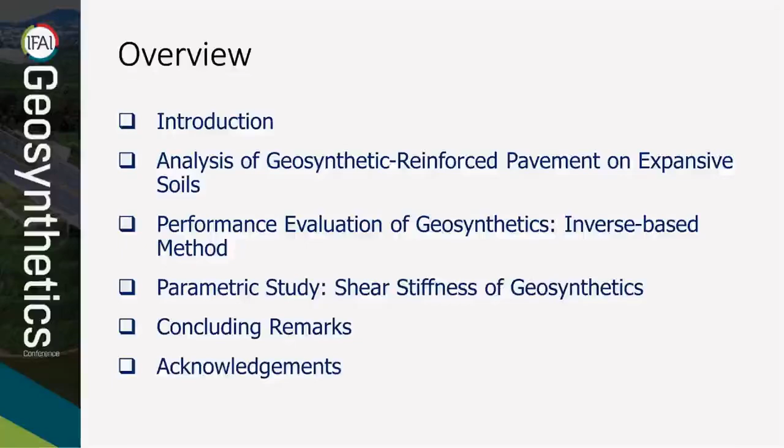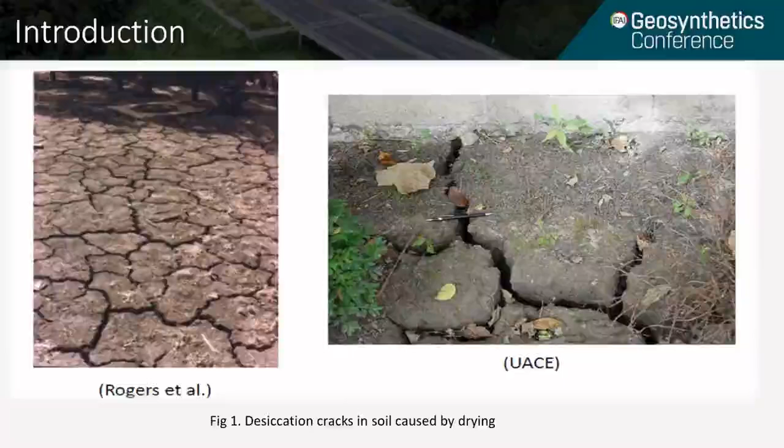In the United States, billions of dollars are spent every year to solve the swelling-related stresses on highways over expansive soils. It is typically not feasible to avoid these soils because of their widespread distribution all over the United States. These soils show volumetric changes because of the presence of swelling minerals such as montmorillonite, that swell or shrink with the fluctuation of moisture content. This figure shows how the soil dries and creates cracking on the surface just because of the shrinkage effect of swelling soils such as the expansive soils.

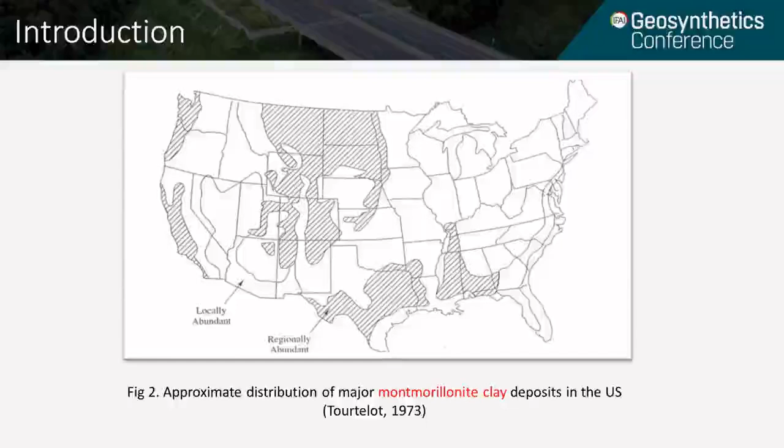This figure shows the approximate distribution of major montmorillonite clay deposits in the United States. You can see from the figure there are some parts such as Texas, some part of Louisiana, and even some of the west coast. Actually, there are a lot of montmorillonite clay minerals available on the ground.

The highways constructed on these expansive soils are subjected to differential movement with seasonal drying and wetting. Because of this, they can cause heave or shrinkage, which ultimately results in the development of cracks that are literally found on the surface of the pavement. In the figure, you can see the most longitudinal cracking developed because of the expansive soil is either on the shoulder of the pavement or along the center line of the pavement cross section.

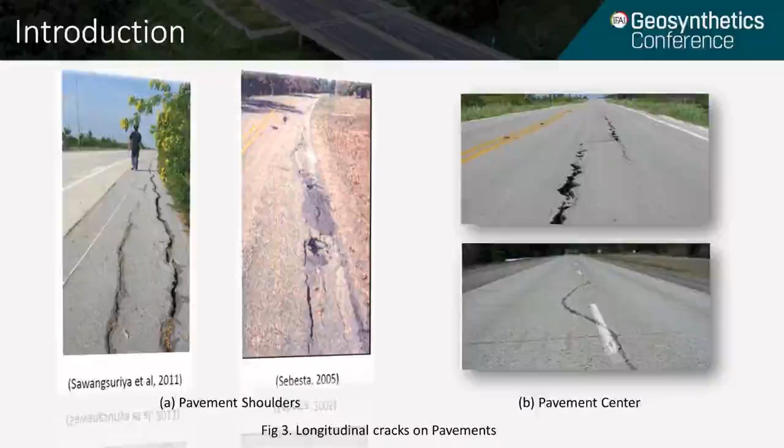To fix this segment of the highway, a mechanical system using geosynthetics can moderate the uplift pressure from the expansive soil subgrade and can protect the pavement surface. Because the pavement structure is good in compression but weak in tension, engineers added geosynthetics in the layer to supplement this limitation of the pavement. A lot of research has been done to understand the effect of traffic loads on the performance of the highway where geosynthetic is put in the pavement layers.

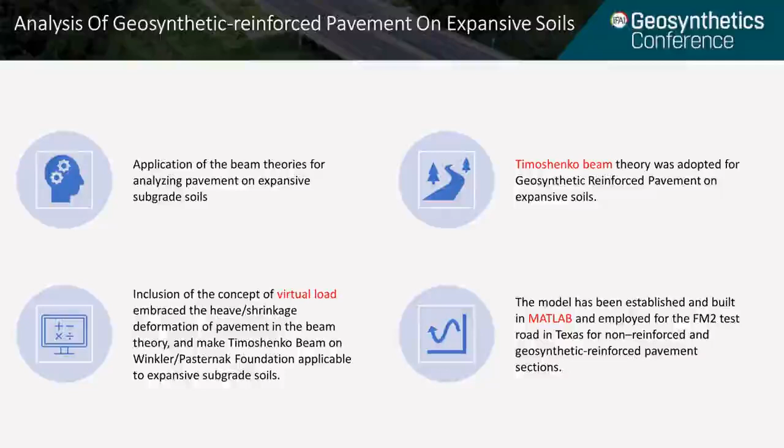However, the performance measurement is not available to understand the effect of environmental loads, such as those resulting from the subgrade volume changes. Many researchers have proposed constitutive models to simulate the behavior of reinforced pavement. However, all the researchers concentrated on a common forward problem. The forward problem means we apply a load on the pavement, the pavement is considered as a beam, and we see how the shear force or bending moment changes within the structure.

But in our case, the pavement deflects not because of an external load, but due to the fact that the subgrade volume is changing. So we have to calculate it through an inverse-based method.

So in this study, we analyzed the geosynthetic reinforced pavement using the beam theories. Some steps through the process to analyze geosynthetic reinforced pavement on expansive soils could be the application of the beam theories for analyzing the pavements on expansive subgrade soils. Then we'll take the Timoshenko beam theory to analyze the geosynthetic reinforced pavement on expansive soils.

So there's a new concept we developed, which is called the virtual load concept. The inclusion of the concept of virtual load will embrace the heave or shrinkage deformation of the pavement in the beam theory, and then make the Timoshenko beam on Winkler or Pasternak foundation model applicable to expansive subgrade soils. The model has been established and built in MATLAB, and this can be employed for different case studies. So we used a case from Texas Roadway Farm to Market 2, for the analysis of the reinforced and non-reinforced sections using this model.

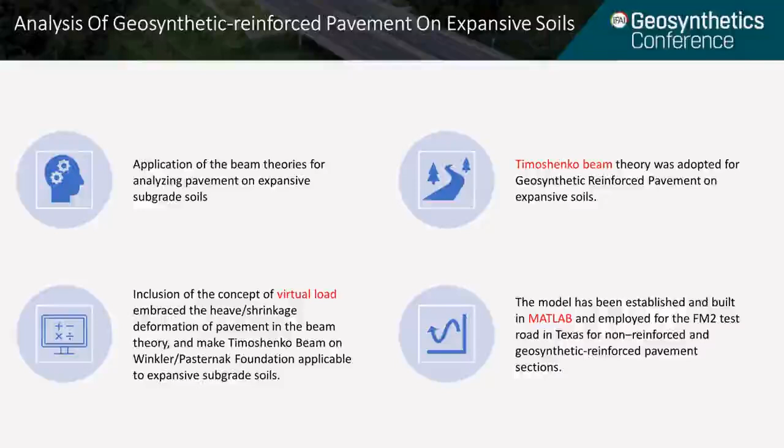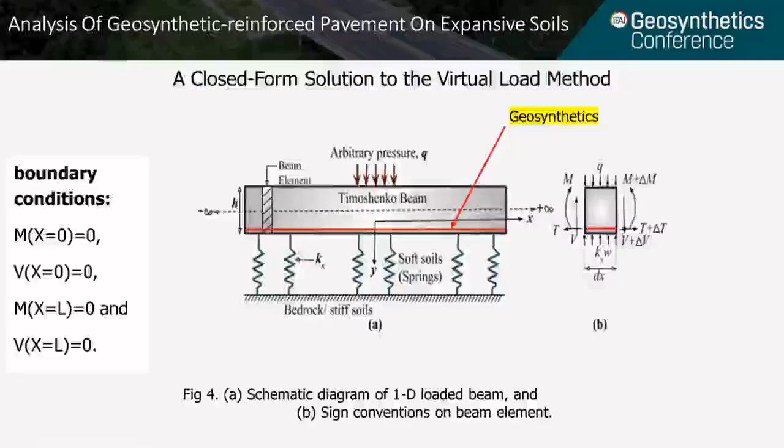So what is virtual load? That's the first question. The virtual load model was developed by Dr. Adnan Khan during his PhD dissertation research at Louisiana Tech University. Virtual load is not a real load, but is the load which causes the pavement deflection equivalent to the heave or shrinkage induced deformation from the subgrade.

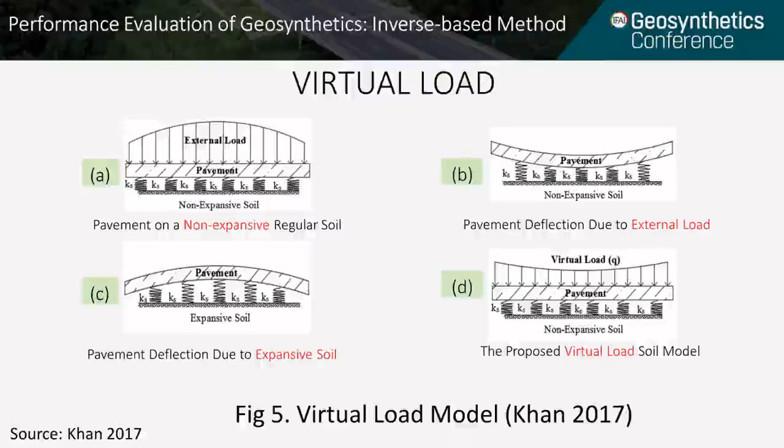From figure A, we see a pavement on non-expansive regular soil where an external load is applied on the pavement, and in figure B, the pavement deflection due to that external load. In figure C, we see the pavement deflection due to the expansive soil, so there is no external load. So we will try to calculate the equivalent load that will cause this amount of deflection. In figure D, you can understand the proposed virtual load soil model, where the virtual load is causing the equivalent deformation from figure C.

To understand the performance of geosynthetic reinforced pavement, we developed the inverse based method. First we have to understand how these longitudinal cracks are developing on the pavement. During the rainfall, the moisture content increases in the subgrade, or during the summer, the moisture content decreases. Since this is an expansive soil, because of the moisture content fluctuations, its volume is changing, either increasing or decreasing. It causes differential movement, and then these longitudinal cracks happen on the pavement surface.

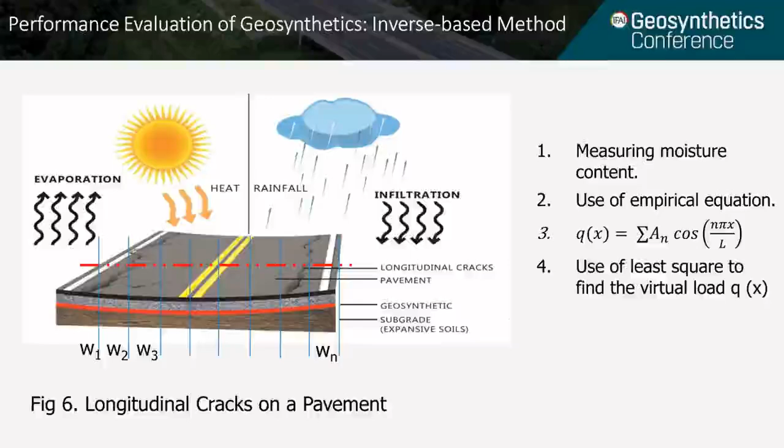Then number 3, we use the load Qx, which is a Fourier series, because using Fourier series we can describe any type of load such as line load or distributed load. Since this is a non-uniform distributed load, Fourier series will give us realistic results. Finally, we will use the linear least square method to find the virtual load parameter and get the virtual load Q. In this study, we are investigating the geosynthetic reinforced pavement, which is simplified as a reinforced Timoshenko beam on an elastic foundation.

So we will study this by selecting a group of parameters, which is shown in the table. These are obtained from previous literature. In the previous literature, they applied a load of 1000 kilopascal on the pavement to finally calculate the deformation. Since our model takes the deformation as an input, we will back calculate the load and see if it gives the exact same load that was applied the first time.

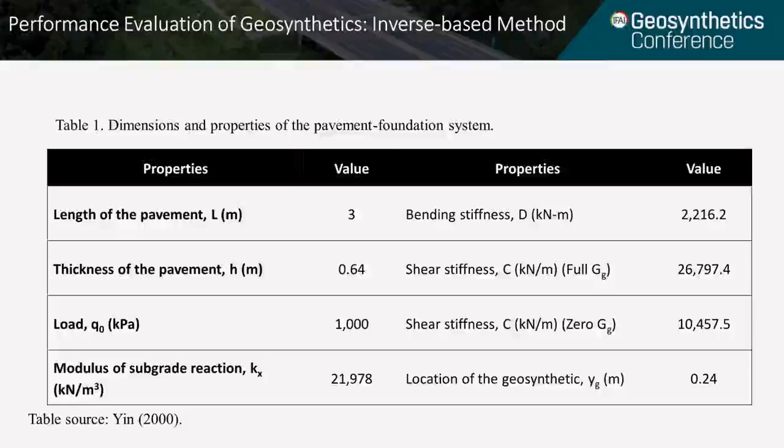In this way we can verify the model, and finally we can calculate the bending moment and the shear forces using our model, and then apply it to realistic case studies like the roadway in Texas FM2.

Here in this figure, you can see the red line, which shows the deflection from the given load Q of 1000 kilopascal, using the forward analysis method. When we use the linear least square or the inverse analysis method, we get this blue line, which is pretty close to the deflection coming from the forward method.

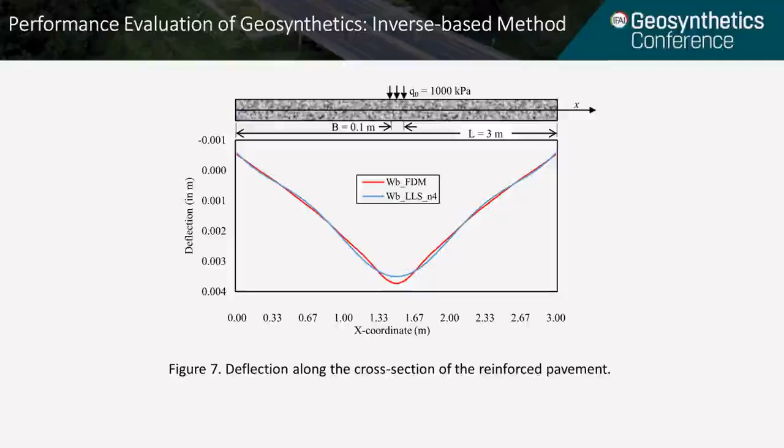Since we are applying the load as a Fourier series, which is unknown, and we know the amount of deflection coming from the pavement, the Fourier constants have to be calculated using the inverse method. All the Fourier constants are regarded as reinforced pavement foundation system parameters, right? We see that the number of Fourier terms taken in this study affects the convergence of the bending moment and the shear force of the beam.

Here we show the amount of load we are getting from the back calculation. The black line represents the external load, and the other lines represent the virtual load depending on the number of Fourier terms used. As we increase from 4 to 8 to 15 to 100, we get closer to the actual external load that was applied the first time.

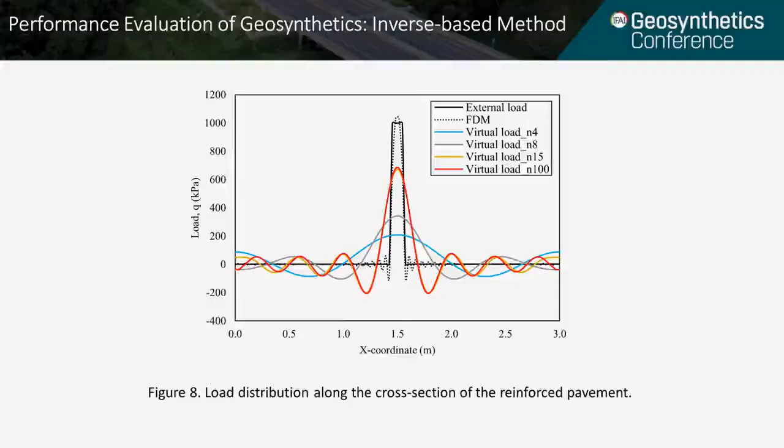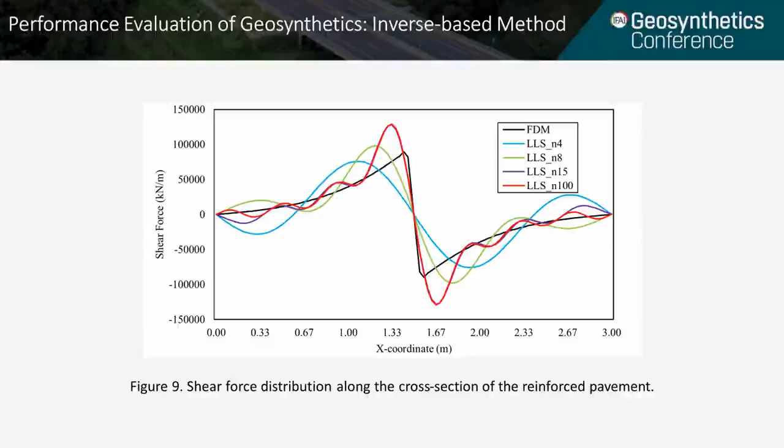This is the shear force distribution along the cross section of the reinforced pavement. The black line represents the shear force calculated using the forward method for the applied load, and the other lines represent the shear force calculated using the inverse method. At the beginning and the end of the pavement or the beam, you can see the shear force converges pretty well. But the number of Fourier terms didn't affect much in this case.

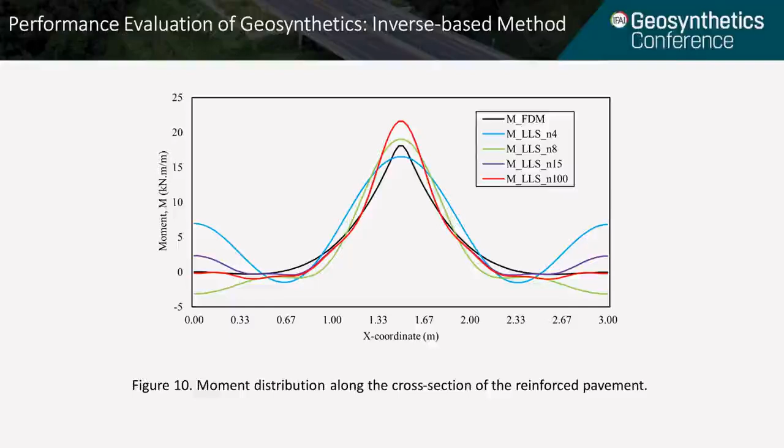This is the distribution of moment along the cross section of the reinforced pavement. Similarly, the black line represents the moment distribution from the forward analysis, and all the other colored lines represent the moment distribution from the back calculation or the inverse analysis method. Since we use linear least square, depending on the number of Fourier terms used, the moment converges or doesn't converge at the beginning and end of the pavement. So we propose the solution with the red line, where the moment converges at the beginning and end of the pavement.

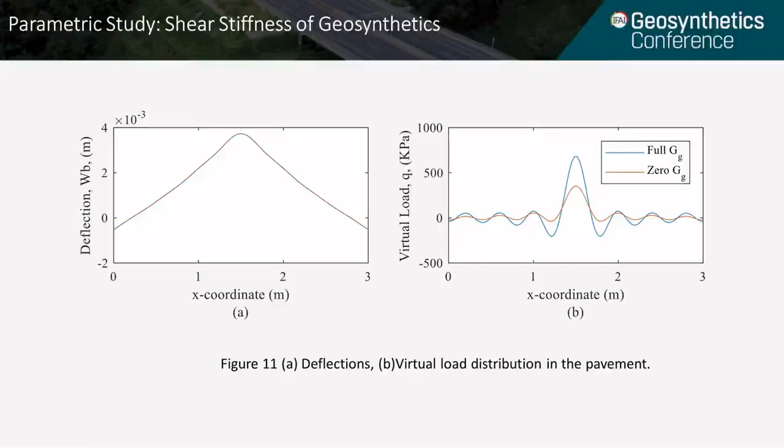Here we present the results for varying the shearing stiffness of geosynthetic. We are presenting the results of rotation, shear force, the moment, and most importantly, the tension in the geosynthetic reinforcement. By varying the shearing stiffness, in the tension diagram we see that the geogrid case, where we consider the shearing stiffness of the geosynthetic, is taking much more tension for the same deflection than the condition where no shearing stiffness is considered, right?

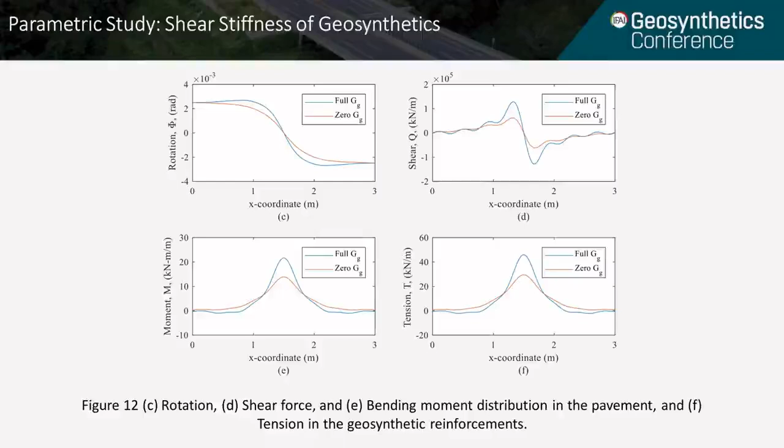So which concludes that geogrid will take much more load, or it will withstand much more deflection in the case where the deflection is coming from the subgrade. So here are the concluding remarks of the whole presentation. So we designed a methodology for geosynthetic reinforced pavement on expansive soils by integrating the volume change induced deformation of the subgrade that was introduced.

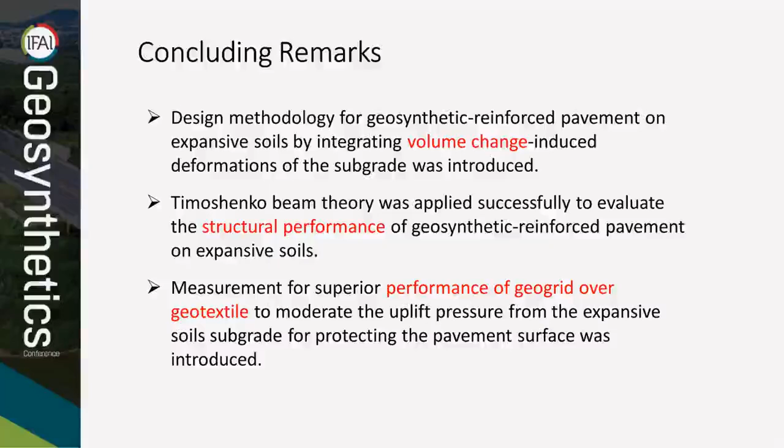So then we applied the Timoshenko beam theory to evaluate the structural performance of geosynthetic reinforced pavement on expansive soil. And another concluding part is the measurement of the superior performance of geogrid over geotextile to moderate the uplift pressure from the expansive soil subgrade to protect the pavement surface was also introduced.

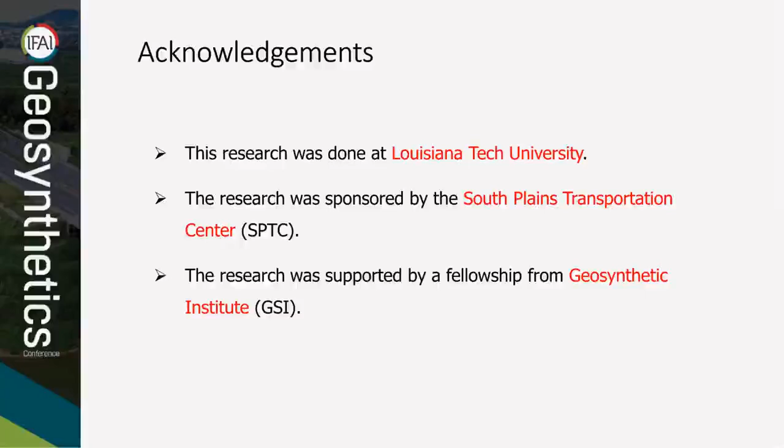So I would like to acknowledge some of the people and the institute, because of them this research was made possible. So this research was done at Louisiana Tech University, and this was sponsored by the South Plains Transportation Center. And this research was supported by a fellowship from Geosynthetic Institute.

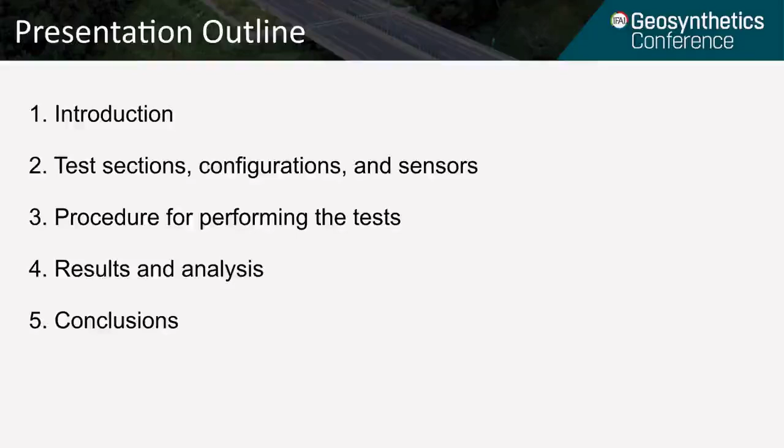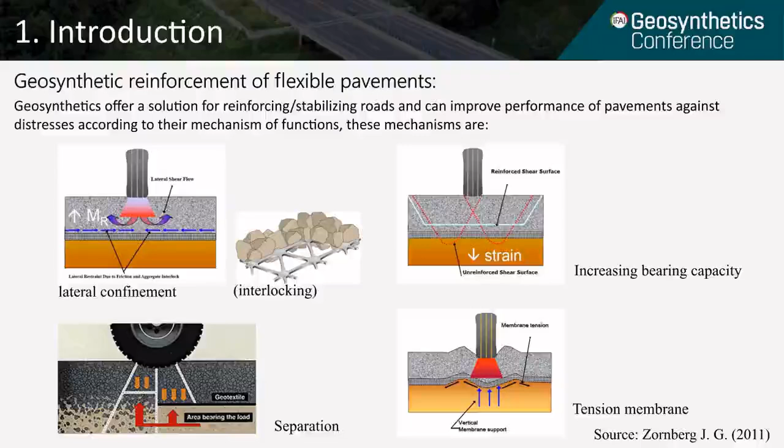Presentation outline includes introduction, test section configurations and sensors, procedure for performing the tests, results and analysis, and conclusions. Introduction. Geosynthetics offer a solution for reinforcing and stabilizing roads, and can improve performance of pavements against distresses according to their mechanism of functions. These mechanisms are lateral confinement, increasing bearing capacity, separation, and tension membrane.

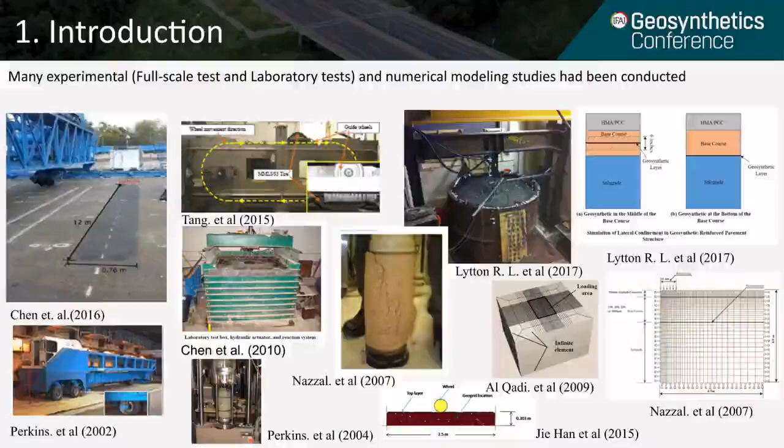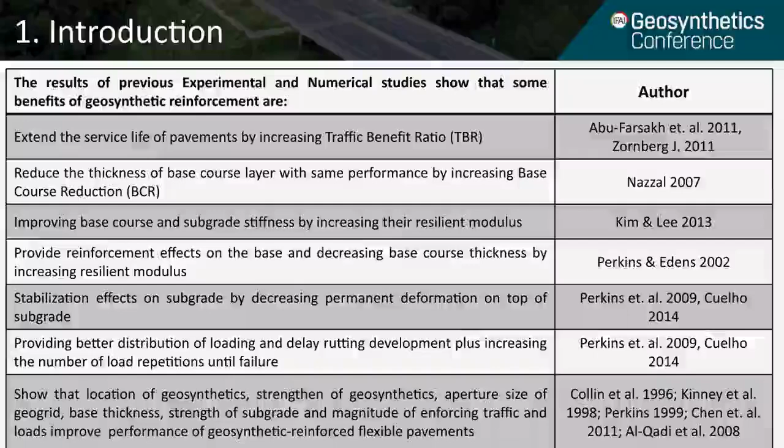Many experimental tests, including full-scale tests and laboratory tests, and numerical modeling studies have been conducted by many researchers. The results of previous experimental and numerical studies showed that some benefits of geosynthetic reinforcement are: extend the service life of pavement, reduce the thickness of base course layer with same performance, improving base course and subgrade stiffness by increasing their resilient modulus, and stabilization effects on subgrade by decreasing permanent deformation on top of subgrade, providing better distribution of loading, and delay rutting development, plus increasing the number of load repetitions until failure.

Appreciable improvement of geosynthetic reinforcement depends on factors such as subgrade stiffness, base aggregate thickness and quality, hot mix asphalt thickness and quality, geogrid stiffness, location, and so on. This research will find what is the current granular equivalent GE factor of geogrid using traffic benefit ratio and base course reduction. Traffic benefit ratio is number of load cycles reinforced over unreinforced for a particular permanent deformation, and base course reduction is base thickness of reinforced over unreinforced for a given traffic.

Minnesota Department of Transportation is assigning a GE of 2 inches to geogrid reinforced.

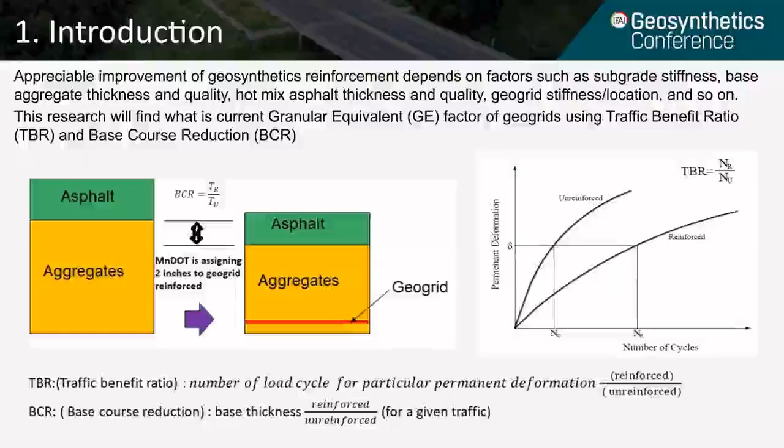A large-scale experimental test plan was developed by using IMAS equipment to evaluate the reinforcement effects of geogrids on the structural benefits of pavements. A total of 8 test configurations were constructed by varying geogrid types, geogrid location in the base course, and base aggregate thicknesses, and the effect of these variables were studied on the resilient modulus, deflection, and permanent deformation results of pavement foundation. The test configuration, procedure of the test, and some details of performed tests and results are discussed in the following sections.

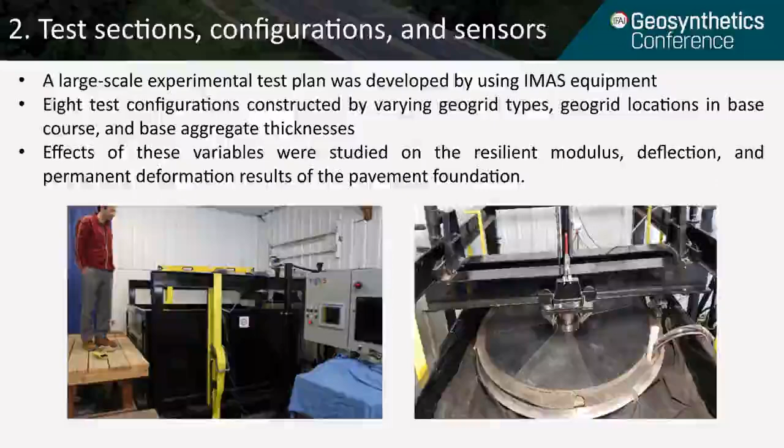As mentioned before, the main parameters and factors studied in this investigation included base course thicknesses, position of geogrid, geogrid stiffness, and geogrid type. The IMAS system was developed to mimic field loading conditions of roadway systems in a large-scale laboratory system wherein the conditions can be more easily controlled. The IMAS performs a cyclic load test with a large number of load cycles, which simulates vehicle loading conditions on the pavement foundation. The IMAS can also help determine the resilient modulus, deflection, and permanent deformation of the pavement, so that the pavement system's service life and the long-term performance of the pavement structure can be evaluated.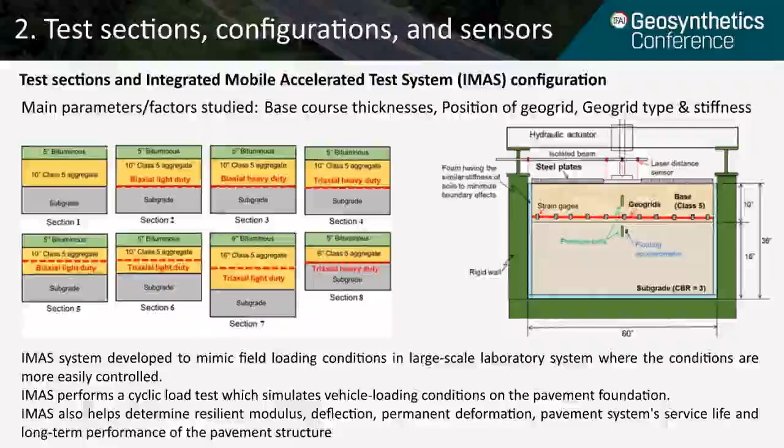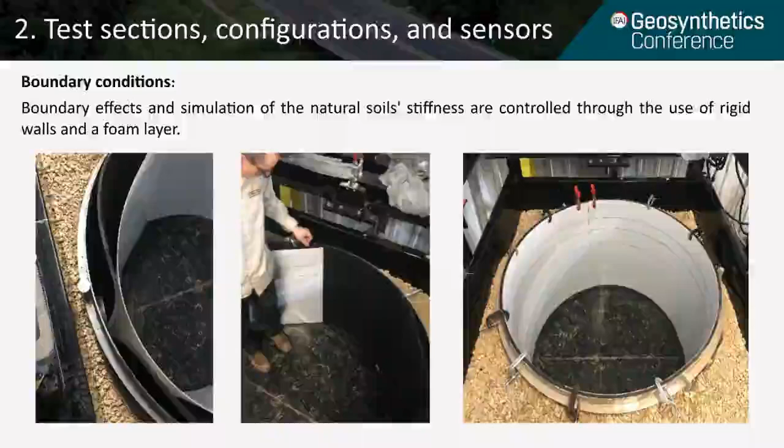Boundary effects and simulation of the natural soil's stiffness are controlled through the use of rigid walls and a foam layer. The thickness of the foam layer was chosen according to the foam material's elastic modulus, soil properties, and realistic boundary deflection during the loading to simulate the effects of a boundary condition in the tank.

Instrumentations were selected according to the literature review, the data type, and the cost. The LVDTs were used to measure the deformation that happened on the pavement. The strain gauges were used to measure the strain behavior on the geogrid rib, and two pressure cells were used to record the pressure.

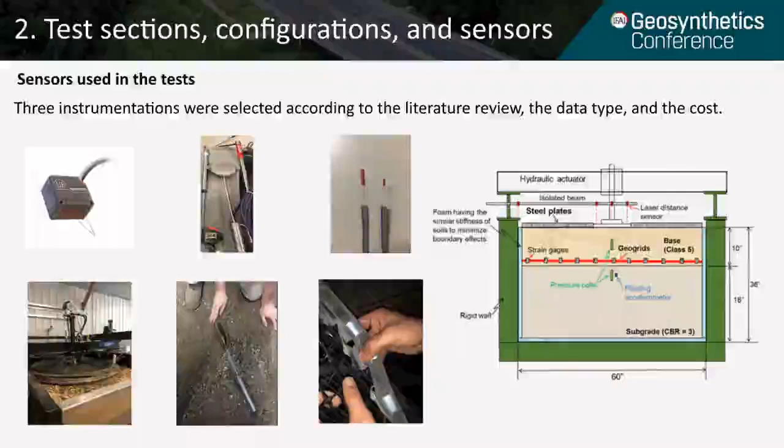Steps of setting up the strain gauges on geogrid are applying the top coat liquid on the strain gauges, adding foam tapes as protection, protecting the strain gauges wires by passing them throughout a plastic tube, setting the geogrid on their positions, setting up the data logger software, compacting the base layer with plate compactor for 3 minutes, and simultaneously recording the strain gauges and sensors results to measure the effect of compaction on the mobilization of the geogrid.

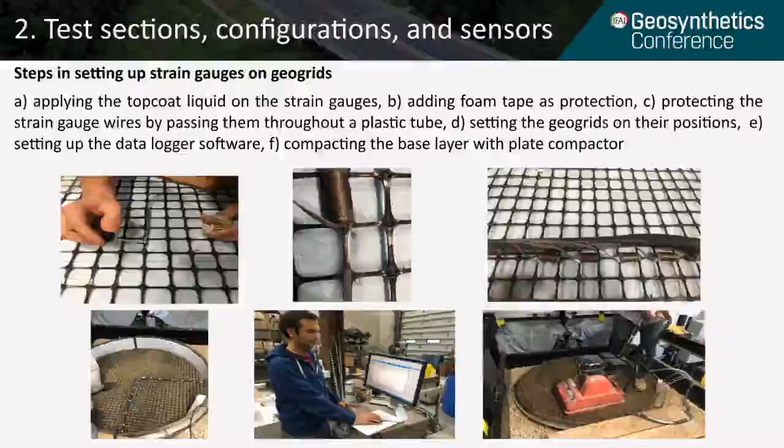A novel pattern of loading applied in this research is based on the random loading according to the concept of vehicle load distributions used in the pavement design for various vehicle classification in Mechanistic Empirical Pavement Design Guide MEPDG. For each test, the load was provided to the IMAS by a 305 mm diameter loading plate sitting above the center of the container. For each test section, to simulate the real traffic loading, 100 different loading shape patterns were assumed and randomly selected during the tests.

Although the loading pattern is random, the distribution followed the same standard for each test. Totally 100,000 cycles of loading were performed in each section with a cyclic load pulse time of 0.15 seconds and a dwell time of 0.85 seconds. Each test took approximately 17 hours to conduct.

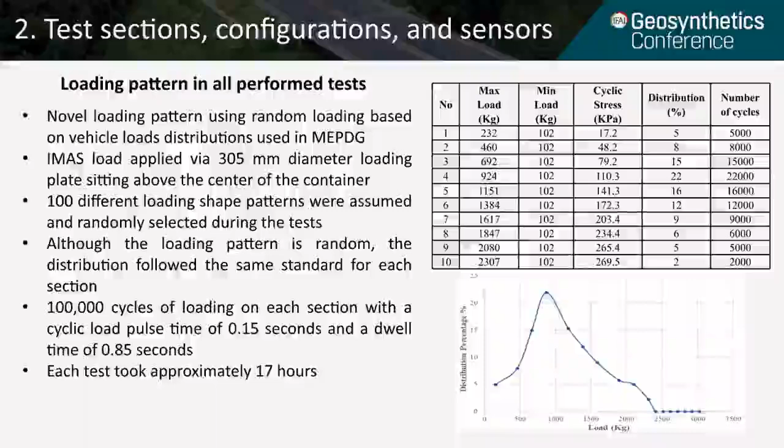The subgrade soil was added layer by layer. Each layer was less than 380 mm high to reach a uniform condition. A 23 kg drop hammer or compaction soil hammer was used to provide compaction after adding each layer. After leveling the surface, a 6.5 HP plate compactor was used to provide the compaction on the base layer for 3 minutes.

A double layer of steel simulated the asphalt surface was used, which provides an equivalent weight of the real asphalt surface. To make sure the geogrids at the interface position will get the maximum involvement and interlocking with the aggregates, a layer of aggregate with a thickness of 1 inch was placed at the top of the subgrade surface. Then the geogrid was placed at the top of this thin layer, and then base material was placed and compacted in the tests.

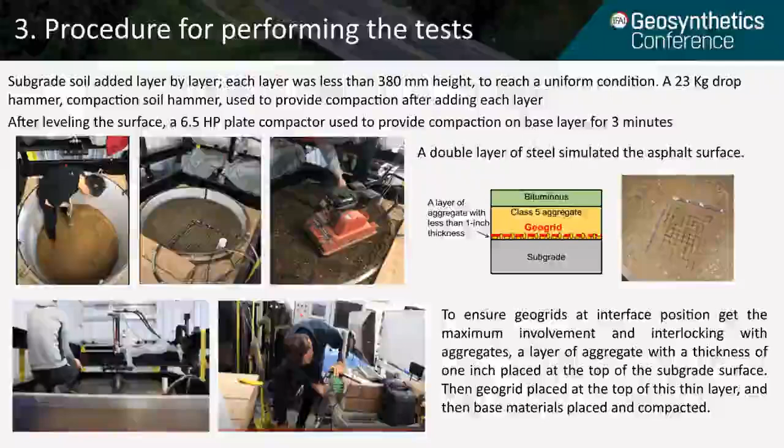Results and analysis. From the results, it can be seen that during the application of compaction loads, the results of strain gauges in biaxial geogrid have fluctuation and reach higher peak values than triaxial geogrids, which gradually increase to get the maximum value of strains. Also, the residual strain in triaxial geogrids is less than biaxial geogrids.

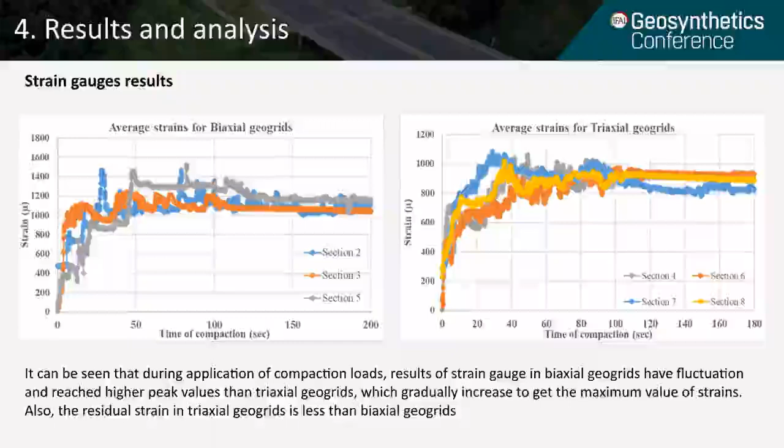Two pressure cells were used for each test, one located on top of subgrade and the other located on top of geogrid in the base aggregate layer, to measure the value of pressure developing in both aggregate and subgrade layers in the tests. The test sections have similar trends. The earth pressure cell data was increasing as the loading occurred, both in the subgrade and base course layer, but the increasing rate and magnitude are higher in the base course layer than subgrade layer.

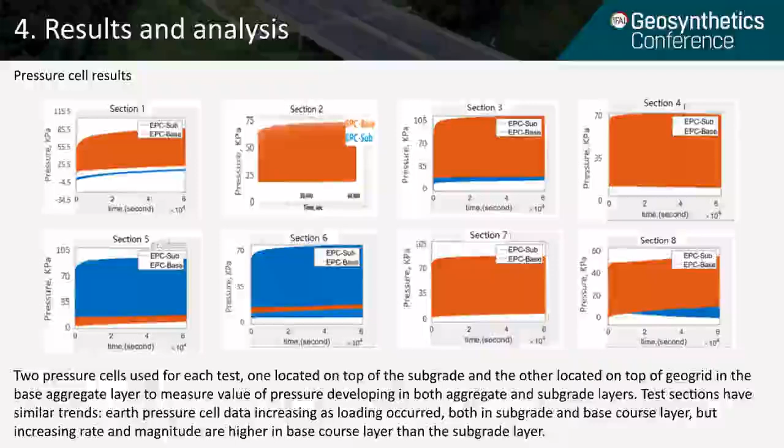Permanent deformation results. From the results, it can be seen that triaxial geogrids perform much better than biaxial geogrids in reducing the permanent deformation of the sections for the same cyclic load numbers.

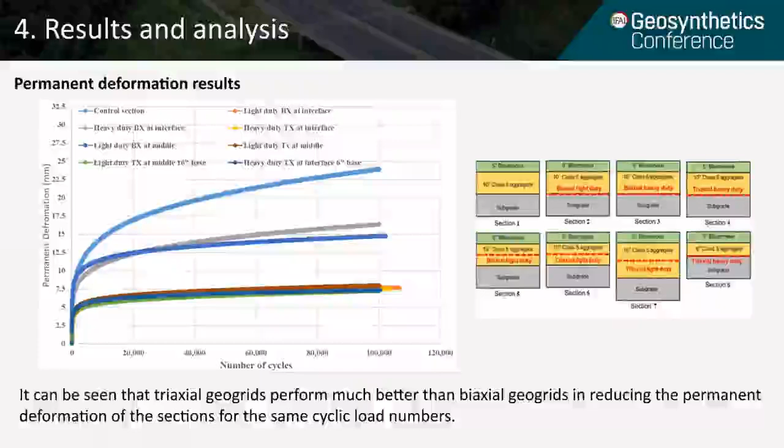Conclusions. From permanent deformation versus number of loading cycles plot, it can be stated that deformation of control section without geogrid reaches almost 1 inch at the end of test. However, triaxial and biaxial geogrid reinforced section deformation curves show a maximum deformation around 0.25 and 0.5 inches respectively, which is almost 1/4 and half of unreinforced section deformation. Generally, it can be stated that triaxial geogrid performs better than biaxial geogrid in decreasing permanent deformation of the pavement.

Test sections with heavy-duty geogrid always have higher pressure cell readings than the light-duty geogrid. Also, since the heavy-duty geogrid has a higher stiffness than light-duty geogrid, the high-strength geogrid provides more confinement pressure as well. For overall earth pressure cell results, except for GE4 and GE7, the test sections have similar trends.

Earth pressure cell data was increasing as the loading occurred, both in the subgrade and base course layer, but increasing rate and magnitude are higher in base course layer than subgrade layer. This evidence supports that the geogrids can stabilize both subgrade and base course layer, but more in base course. GE4 and GE7 have a converse result, and the reason may be caused by geogrid location.

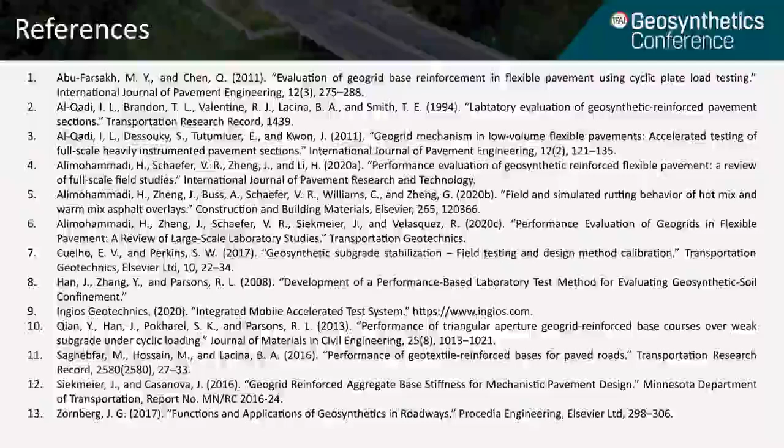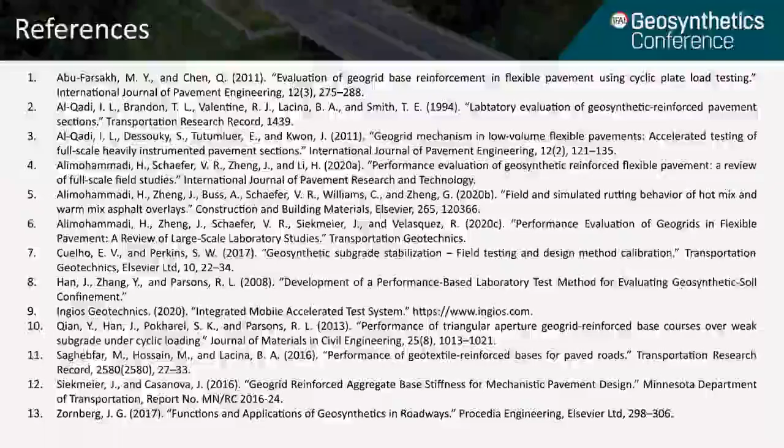Hello, everyone. If you're hearing this recording, that means you're residing in the universe where I managed to get under the time limit, so that's good.

Our presentation today is life cycle cost analysis of geotextile separator layer in low volume secondary pavement. So let's get to it.

My name is Chaz Weaver. I am the District Materials Engineer for the Virginia Department of Transportation in our Staunton District. And my partner in crime is Audrey Moruza, research scientist at the Virginia Transportation Research Council located at the University of Virginia. A few years ago, the VTRC began a study to research aggregate contamination by subgrade fines.

Over the years, our maintenance operations have caught distresses such as the ones in the left picture here. That is a secondary pavement in Virginia. And in the wheel path, you can see the alligator cracking and rutting and the fines that have actually migrated from the subgrade through the subbase aggregate layer and to the surface of the roadway.

In the picture on the right, that is Interstate 81. It is a severely high amount of truck traffic. And although we have 14 inches of hot mix asphalt there, even though we have that much structure, you can see the subbase aggregate layer below the asphalt has been completely contaminated over time by the subgrade fines because there was no separator there.

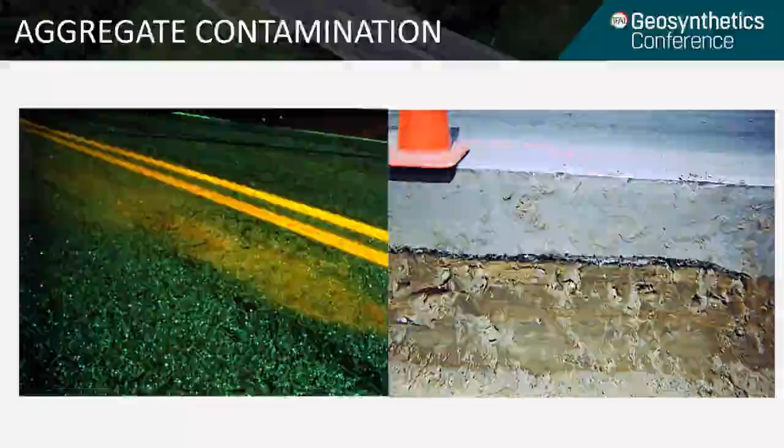Being that we're at the Geosynthetics Conference, I think we can all agree that this happens in practice. The 8-inch clean stone that you designed and constructed is not necessarily there 30 years from now, depending on your subgrade conditions. But our current pavement design methods do not take this into account. So part of our VTRC study was to use an innovative life cycle cost analysis that we'll be talking about.

So the first step in our life cycle cost analysis is to develop the two different pavement structure cases. We used VDOT's standard pavement design method, which is 1993 AASHTO. The parameters in the table, for the most part, are VDOT set parameters. The ones that are varied for our cases are the 155 annual daily traffic and the 1500. The 155 ADT case gives us the thinnest pavement for a secondary roadway. That is 1.5 inches of asphalt overlaying 8 inches of aggregate.

The thicker, the 1500 AADT with 5% trailer trucks and 1% single unit trucks gives us a very thick pavement for a low volume secondary road. And that is 6 inches of asphalt over 5 inches of aggregate. You also note one of the variables at the bottom, subgrade resilient modulus. In 1993 AASHTO design, that equates to a CBR of about 3.3.

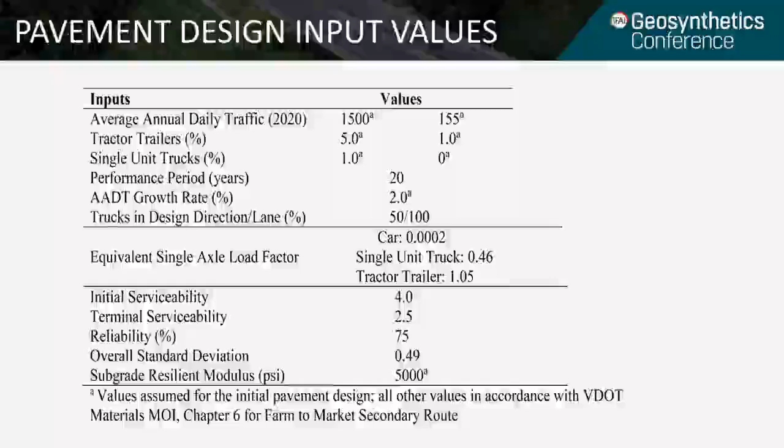In a conventional life cycle cost analysis, the maintenance activities are prescribed. In other words, you may be required to do an overlay in year 15 or reconstruct the pavement in year 30. The innovative portion of this life cycle cost analysis is that we're trying to incorporate the contamination of the aggregate layer and the deterioration of the asphalt layers in more of a real world situation.

So the top two graphs show the contamination of the aggregate layer, two different methods. One on the left, structural coefficient, and the one on the right, the remaining layer depth, or the thickness of the remaining aggregate layer. And basically in AASHTO 1993, you can see these are the same thing. So for efficiency's sake, we chose to go with the remaining layer on the right. The bottom two graphs show the idealized deterioration of the asphalt layers.

On the right, almost mimicking the AASHTO 1993 pavement design guide, you see that there's a great fall off at the end. Those are for the surface structural coefficient. For base and intermediate layers, anything below the surface, we know that it doesn't fall off at year 20. Even though it's a 20-year pavement design life, it doesn't actually do that. You don't really, even if the asphalt layer is stripped and delaminated, you don't get a zero structural coefficient.

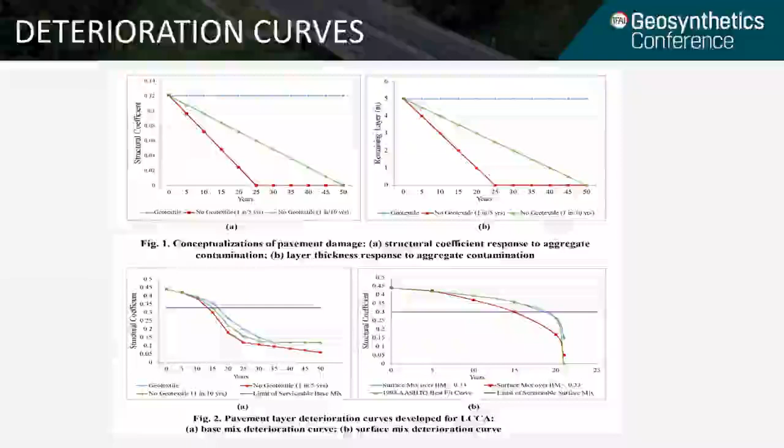So this is the idealized curve for different contamination rates. In 2019, PennDOT released a study where they measured the migration of fines into subbase using cyclic loading. So this fell right into our alley for this research.

Right here is a quick summary comparison of the two between the PennDOT study and typical VDOT subgrade and pavements. You can see the subgrade soil is very similar, and the aggregate is also very similar, probably similar to your DOT specifications as well. The pavement structure, however, for the PennDOT study was somewhat thicker than the two cases that we came up with earlier.

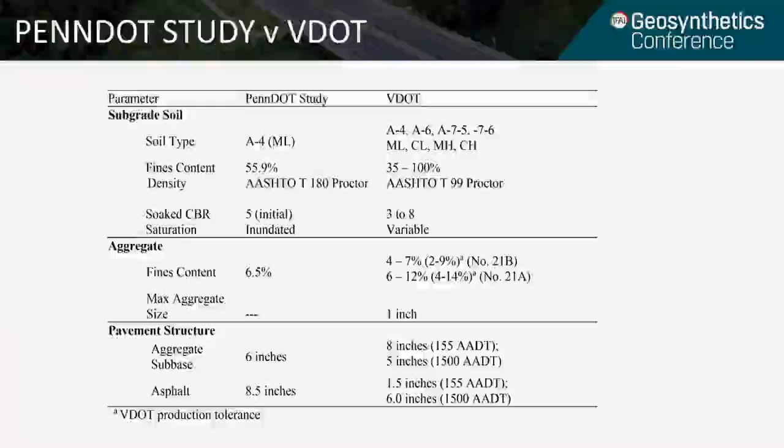You can see the aggregate is basically the same, 5 and 8 inches at VDOT versus 6 in the PennDOT study, but the asphalt is a little thicker, 8.5 inches for PennDOT versus our very thin 1.5 inches and 6 inches for our secondary pavements.

This graph illustrates how we took into account the differing asphalt layers between PennDOT's study and our two pavement design structure cases. The Kermani ESALs there on the right is the PennDOT study. We interpolated the thinnest VDOT pavement on the left and the thicker VDOT pavement in the middle. So these gave us our contamination rates.

But in order to bracket the real world contamination rate and make sure that our study was broad enough, we actually used the equivalent of 1 inch of aggregate contamination per 5 years, per 10 years, and per 20 years.

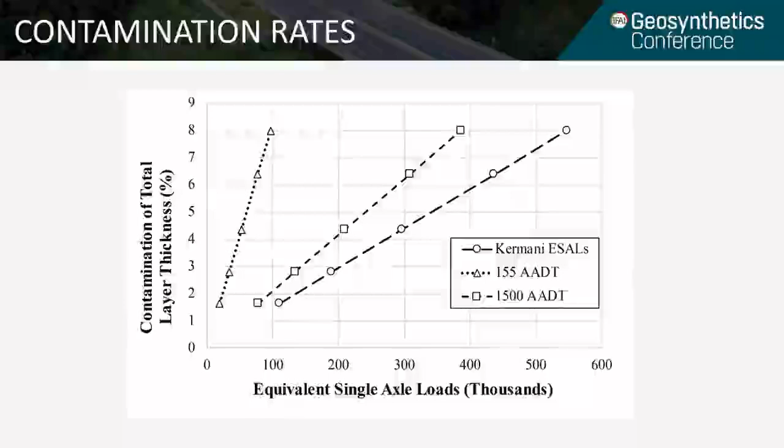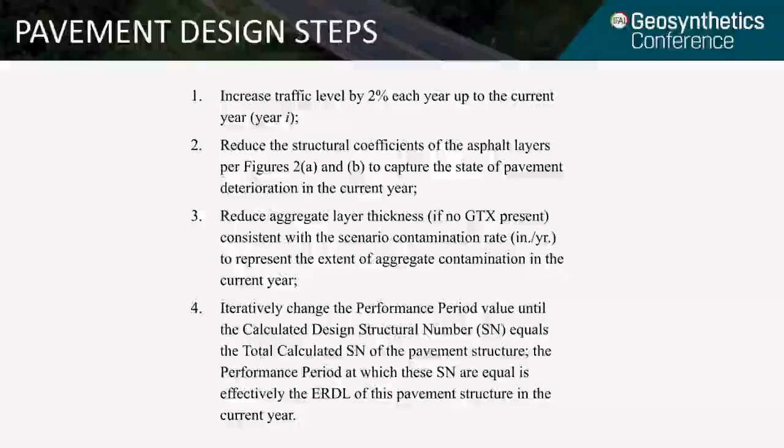Now that we have our initial pavement designs and contamination rates, the next step is to do the pavement design runs. The first step is to increase the traffic level by the 2% growth rate each year. Then we reduce the structural coefficients of the asphalt layers to capture that deterioration based on the curves we just saw. The third step is to reduce the aggregate layers for the cases where no geotextile separator is used. For cases where the geotextile separator is used, obviously there's no reduction in the aggregate layer. And finally, we iteratively perform pavement designs to back calculate the estimated remaining design life.

This table provides an example of a pavement case that was not constructed with geotextile separator, so contamination is happening. Also, the DOT has not performed any preventative maintenance. This is our thinnest pavement, the AADT 155, and the greatest contamination rate, 0.2 inch per year or 1 inch every 5 years. The pavement design back calculations that we just looked at provide the estimated remaining design life column

on the left. The SSC column on the right is the surface structural coefficient based on the deterioration curves we just saw. So as the AADT, as the traffic goes up 2% per year, we can see the asphalt surface layer deteriorate as it ages. So for 2035, as an example, the SSC is 0.358. It's greater than 0.3, which is the cutoff we determined for maintenance operations. The estimated remaining design life, however, is 2.8, which is less than 5 years. We're looking at this in 5-year increments.

So the maintenance decision at that point is to patch because the surface is relatively good, and normally at a DOT that is what would occur. It's not always by the book. 5 years later, in 2040, now the surface has dropped below that 0.3 threshold. The ERDL is very low, so the maintenance decision is to overlay. And typically that is how DOTs operate. We'll overlay much quicker than we'll reconstruct. So after that 1.5 inch overlay, our estimated remaining design life is now 11.4 years.

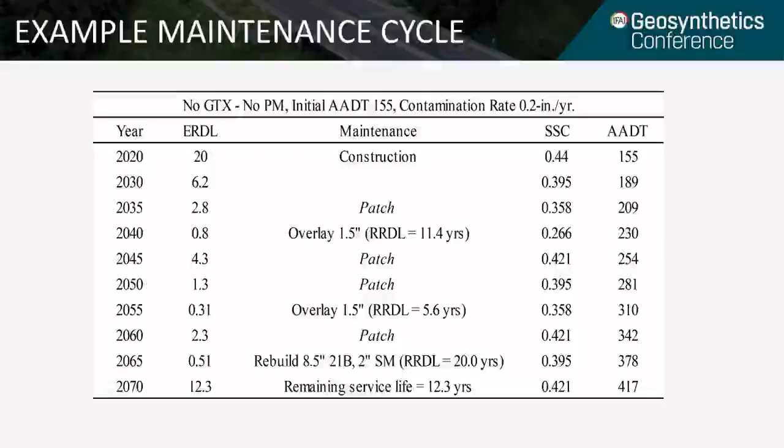Another important aspect of our life cycle cost analysis are the materials costs. The example shown here is for geotextile separator by square yard, depending on the quantity. This data was taken from VDOT bid data from 2008 to 2018, and we did the same thing for all of the materials used in the pavement design and any maintenance.

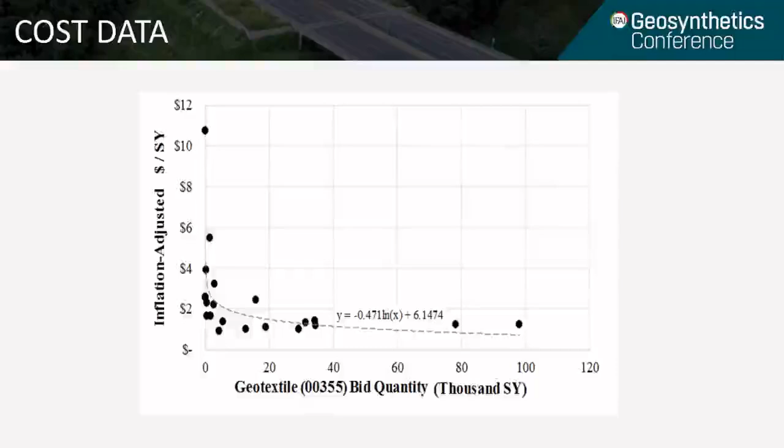Another innovative aspect of this LCCA, we also included maintenance of traffic costs, pavement markings, guardrail, inspection, any ancillary costs that are not usually captured in a life cycle cost analysis to make it more applicable to real world VDOT projects. One thing to note, the graph here shows installed cost of geotextile, not just material cost. Now that we have a maintenance schedule for each of our pavement designs, different pavement cases, and all of our variables, we can easily calculate our life cycle costs.

However, the question remains what to do with that salvage value at the end. The VDOT manual of instructions would tell you to ignore salvage value, but we're trying to be as real world and as detailed as possible. When you have a pavement at the end of year 50 that is in excellent condition, you think of that more as an asset. When that pavement is distressed, you've gotten to year 2070, but it's not in very good condition, you think of that more as a maintenance liability.

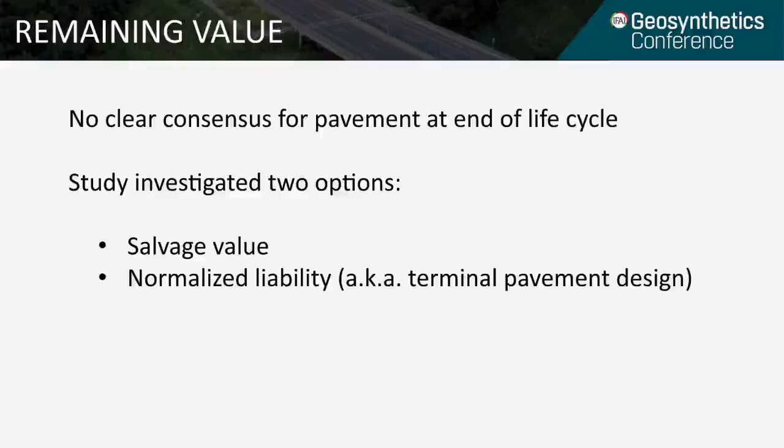So in our life cycle cost analysis, we looked at two different options: one in which the estimated remaining design life is an asset, and one in which that's actually not an asset but a normalized liability. The two methods for terminating the pavement life cycle are different in a key way. The salvage value is subtracted from the total discounted cost calculated in the LCCA. The normalized liability is actually added to that total discounted cost because it is a maintenance liability moving forward.

The salvage value is easily calculated by taking the estimated remaining design life, dividing by the 20-year pavement design life, and multiplying that by a constant cost of a 20-year pavement design. The normalized liability is calculated by designing a 20-year pavement design, what we call the terminal pavement design, based on the conditions of the pavement structure at year 50.

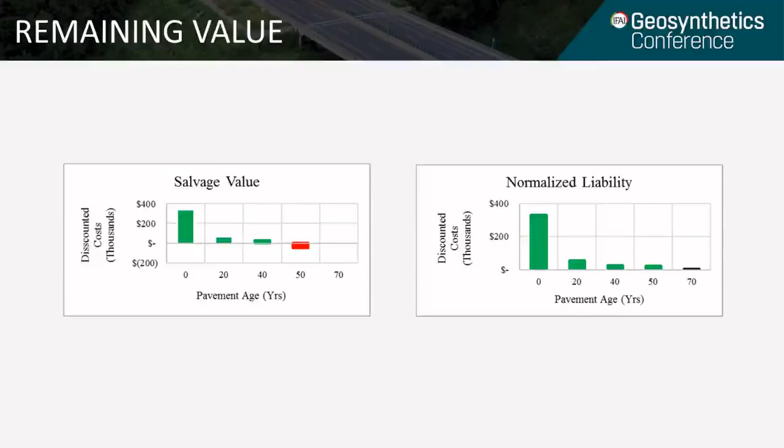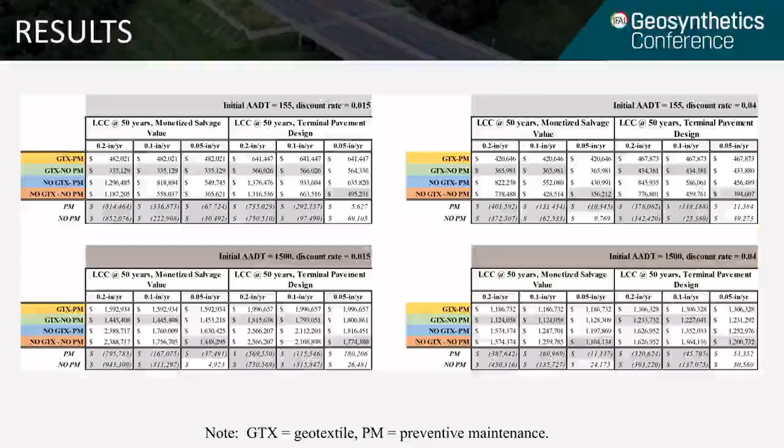The bottom 2 rows of each table show differences between pavement designs with and without preventative maintenance. So the top row, PM, we used preventative maintenance. Bottom, no PM, no preventative maintenance by the DOT. Basically in these tables, the shaded cells show savings. The main variable is the contamination rate. So for instance, the lowest contamination rate, 0.05 inch per year, or 1 inch over 20 years, does not show any benefit to using a geotextile separator. But for the rest of the cases where contamination rate is reasonable, the geotextile separator shows a remarkable benefit.

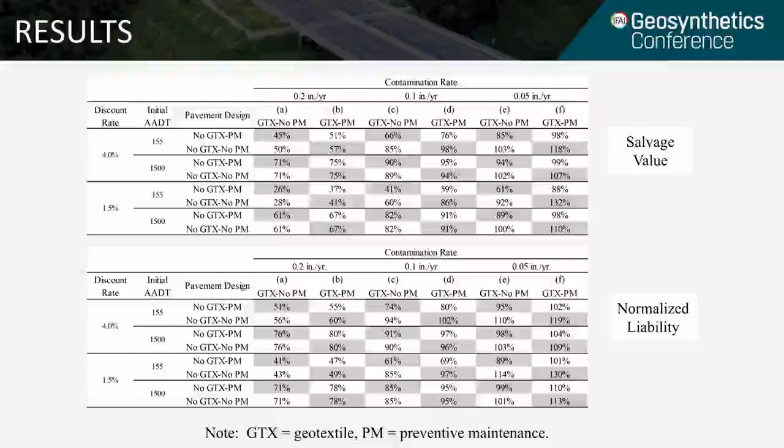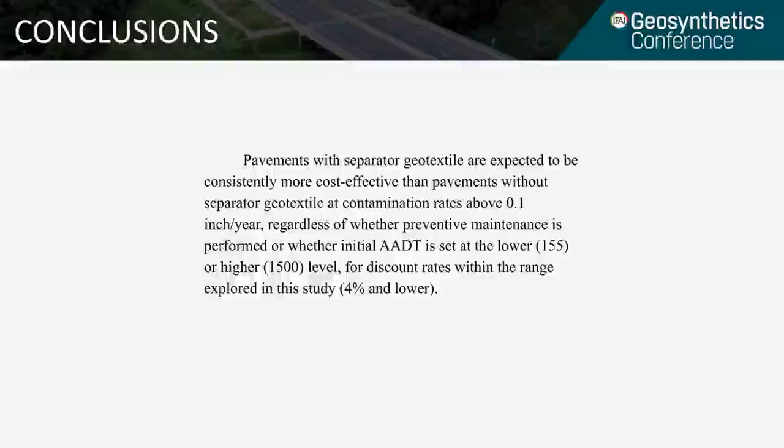Again, only the lowest contamination rate shows no appreciable benefit by using a geotextile separator, but all of the other cases do. So in conclusion, pavements with geotextile separators are expected to be cost-effective and outperform pavements without geotextile separator layers. This is regardless of pavement thickness or traffic volume, whether preventative maintenance is performed or not, and at various discount rates. Looking at this information another way, there is a significant life cycle cost advantage to utilizing geotextile separators. These outperform pavements without geotextile, even if preventative maintenance is performed. If preventative maintenance is not performed, the geotextile separator cost advantage increases.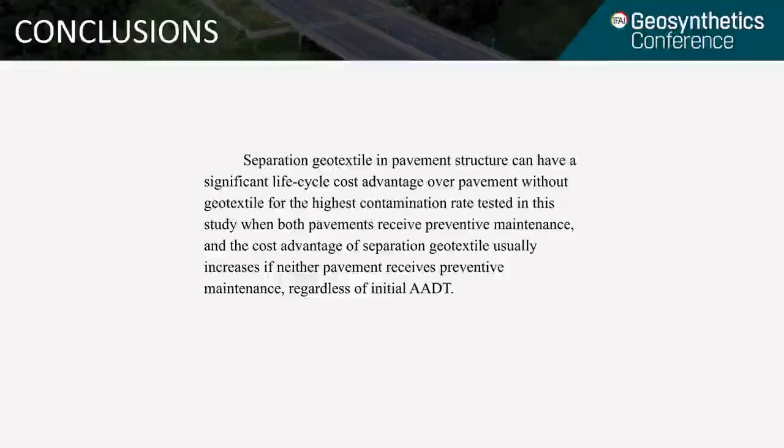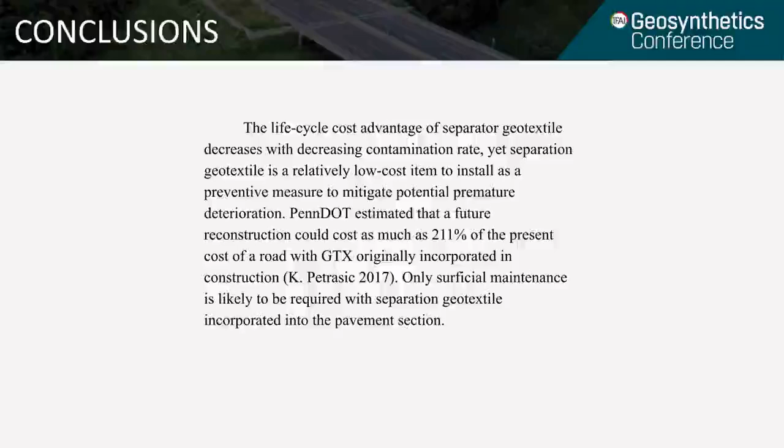This study also showed that the life cycle cost of the pavement decreases with decreasing contamination rate, although the cost of geotextile is a relatively minor one to ensure the subbase aggregate layer continues to perform properly. With a competent aggregate layer, only superficial maintenance is required. It should also be noted that the loss of permeability in the aggregate layer due to subgrade fine contamination was not included in this study, although it is expected that this will also affect pavement life.

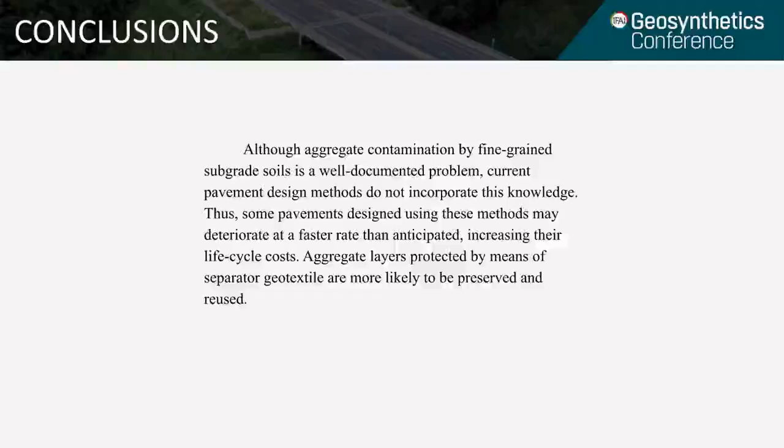As we've noted, current pavement design methods do not consider aggregate contamination. Thus, some pavements designed using these methods may deteriorate at faster rates than expected, increasing their life cycle maintenance costs. Aggregate layers protected by geotextile separators are more likely to be preserved and reused at the end of the pavement structure's life.